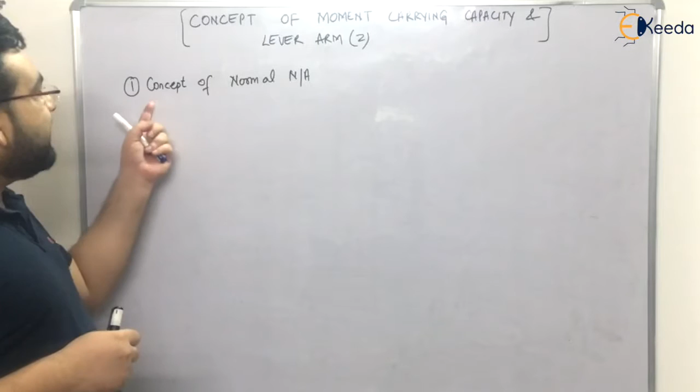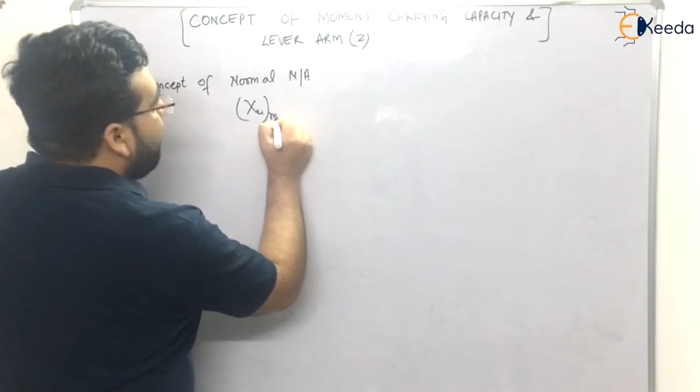But before that, let us discuss the concept of the normal neutral axis. I told you that as per the limit state method, the ultimate maximum neutral axis, XU max, is given by 0.53D for Fe250, 0.48D for Fe415, and 0.46D for Fe550. I have already told you these things, right?

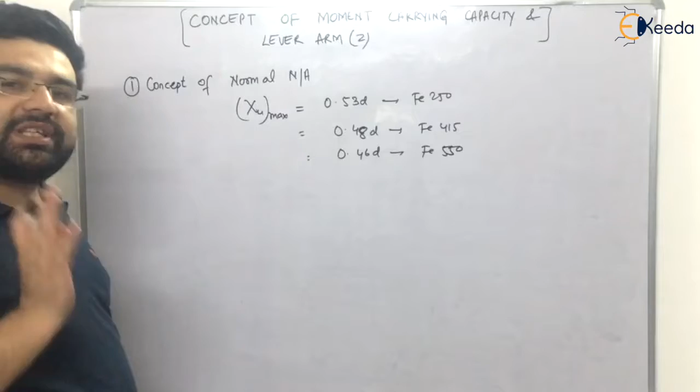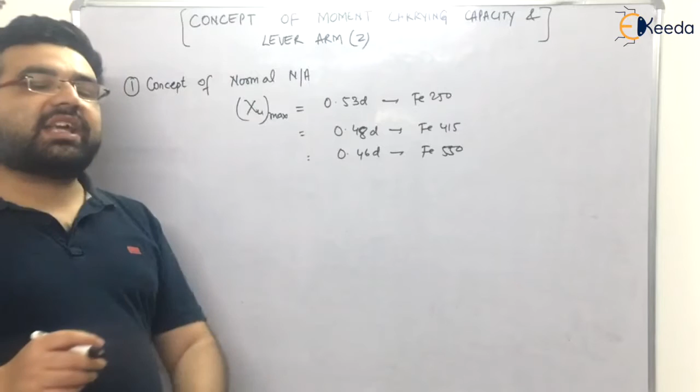Now, in working stress method, we also came up with the concept of normal neutral axis. Is it the same here also? Yes, the same here as there. In working stress method, we got the normal neutral axis by the static equilibrium condition, remember? Here also we have to apply the static equilibrium condition. So what is the static equilibrium condition? The compressive force is equal to the tensile force.

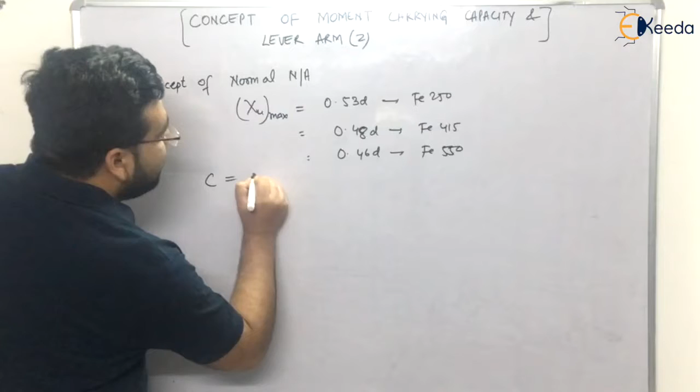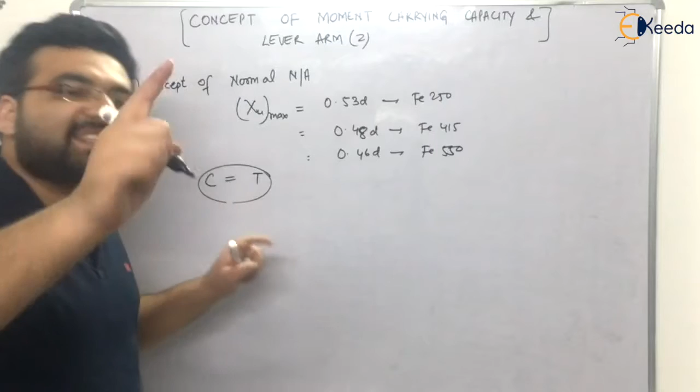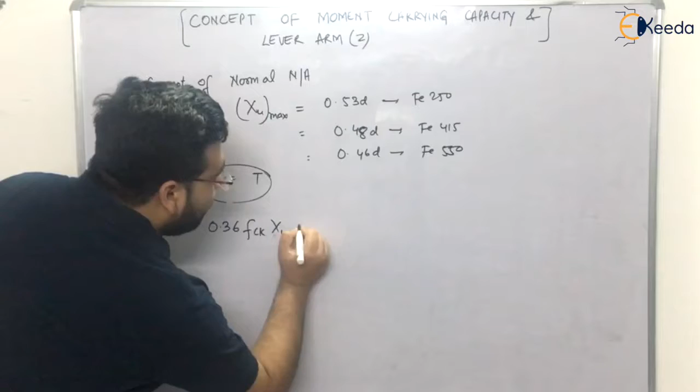Now you will see why I had derived the total compressive force. So the total compressive force equals 0.36 FCK into XU into B. This is the total compressive stress into XU, FCK into XU into B. This is the total compressive force.

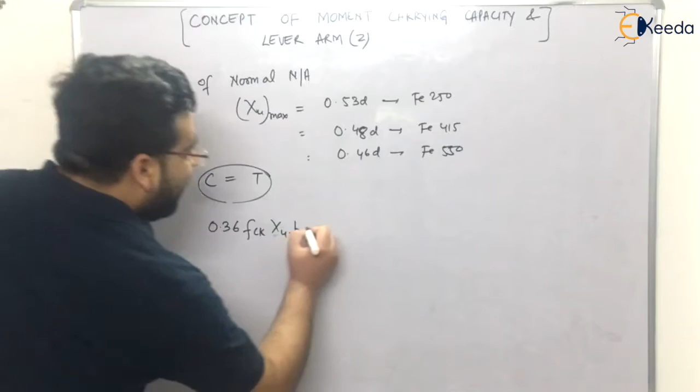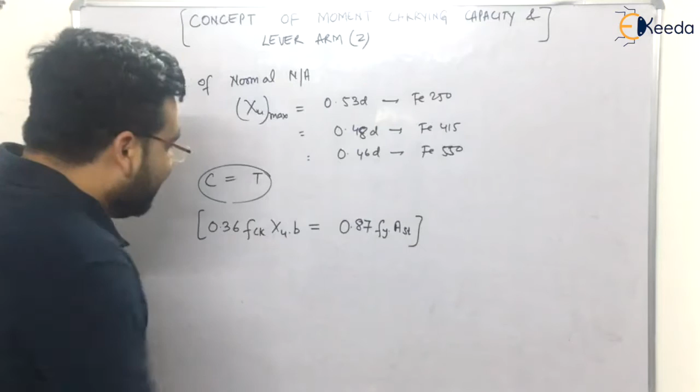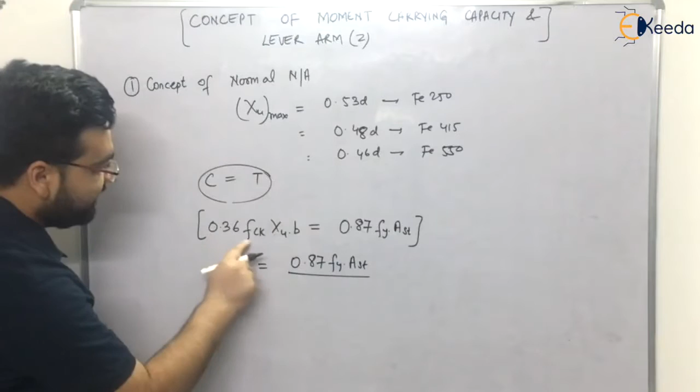This will actually be equal to the tensile force. And how much is the total tensile force? That is 0.87 Fy into AST. Now this XU is actually the normal neutral axis, not the maximum neutral axis. So XU will be equal to 0.87 Fy into AST divided by 0.36 FCK. So this is the normal neutral axis.

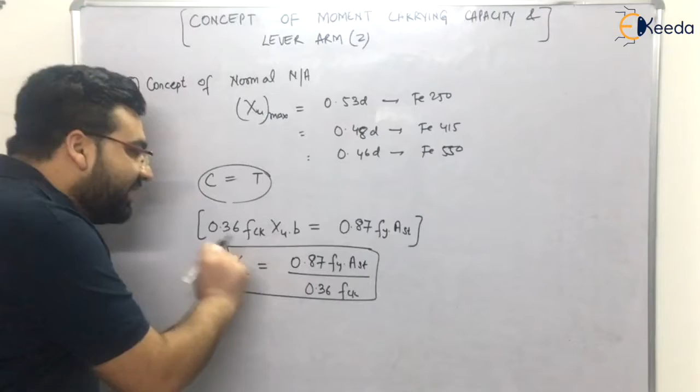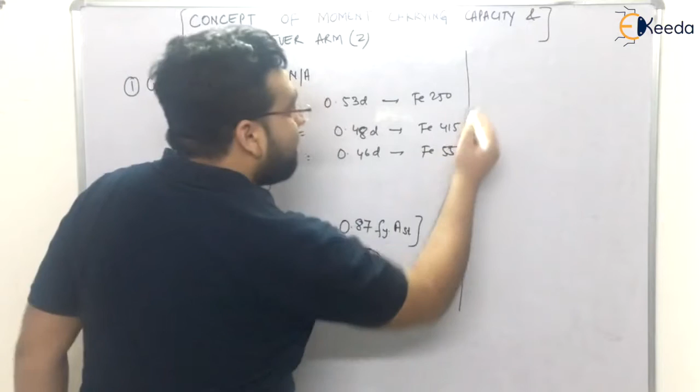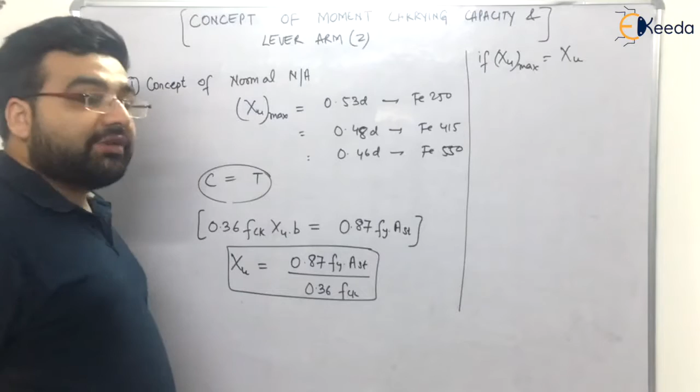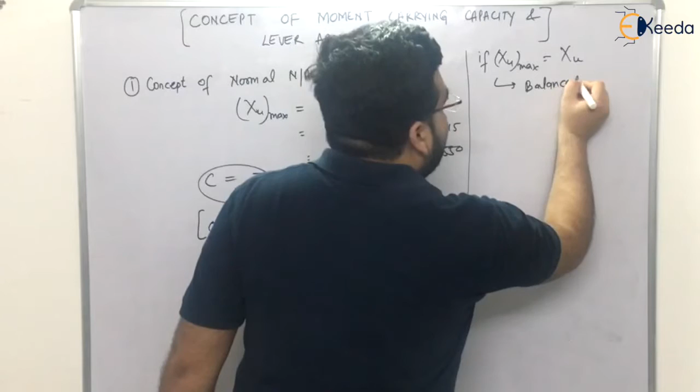Simple, right? Now let us discuss three conditions, relating the working stress method with the limit state method. In working stress method, if XU max equals XU, or the actual neutral axis, it was a balanced condition. Is it the same case here? Yes, if XU max equals XU, it is a case of balanced section. And when you have a balanced section, then C is equal to T.

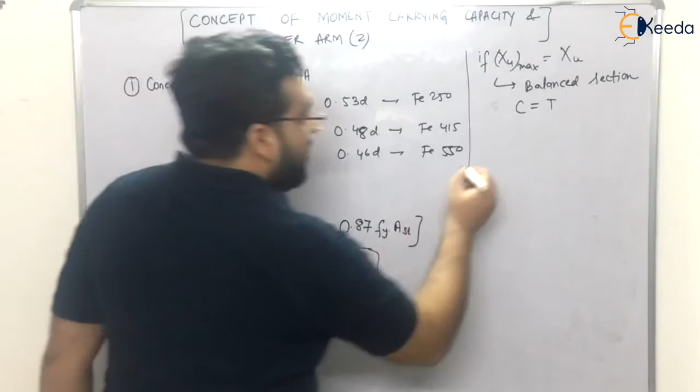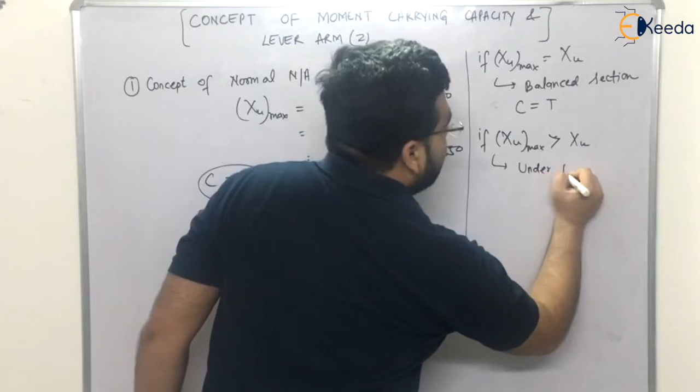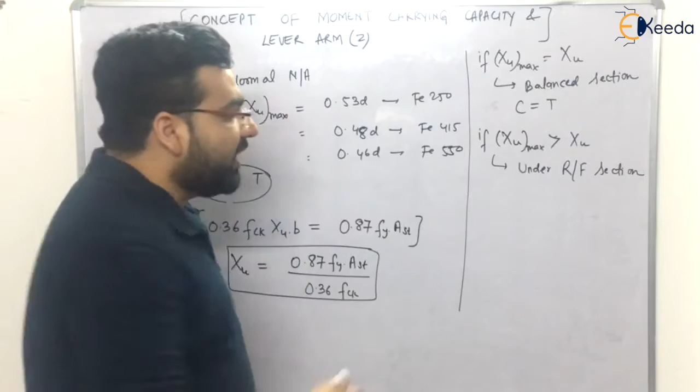Second, if XU max is greater than XU, then in working stress method this was a case of under-reinforced section. So here also the same case: it will be an under-reinforced section. And when you have an under-reinforced section, the reinforcement has a higher stress, so T will be greater than C.

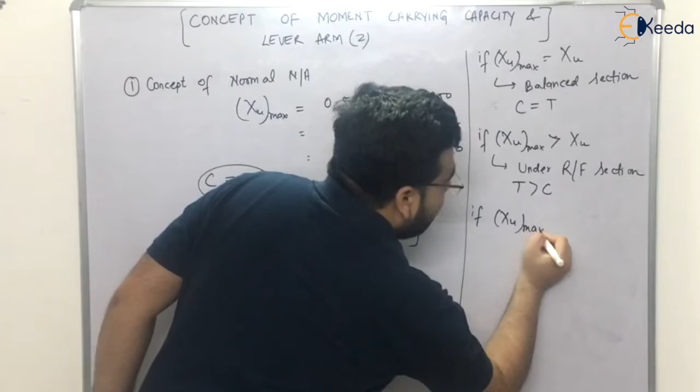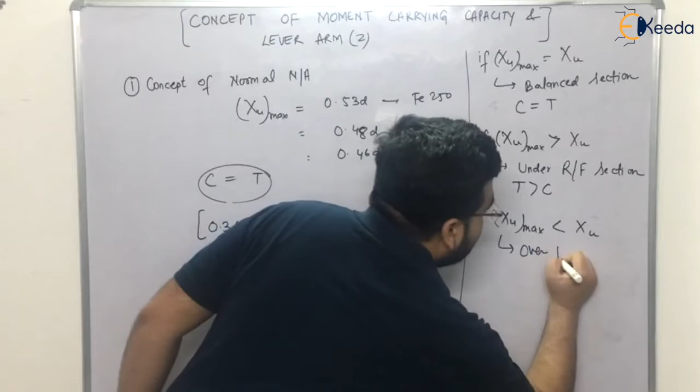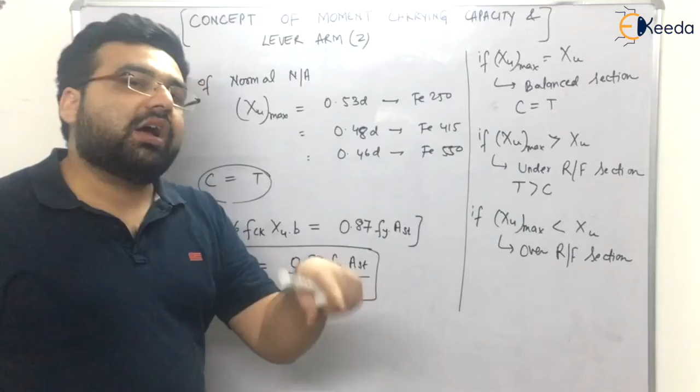Third, if XU max is smaller than XU, in working stress method this condition was an over-reinforced section. Here also it is an over-reinforced section. And when you have an over-reinforced section, the concrete fails earlier, meaning the compressive stress is higher compared to the tensile stress, so C is greater than T.

Simple, right? So I have related the working stress method with the limit state method. I hope you have understood the concept of balanced, under-reinforced and over-reinforced sections. Very important, because many numericals have been asked from this topic.

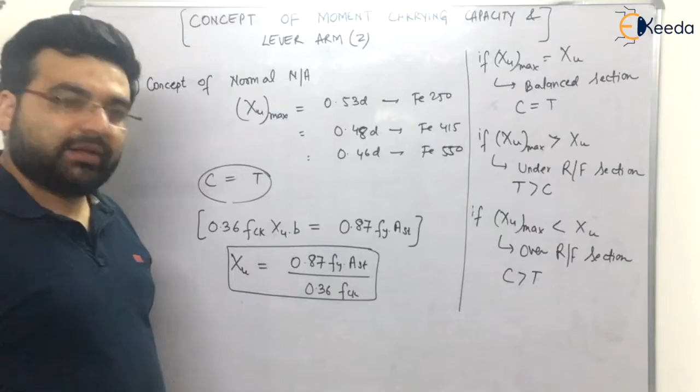Now let us move to our concept, that is the moment carrying capacity and lever arm. So how much will be the lever arm? Let me rub this.

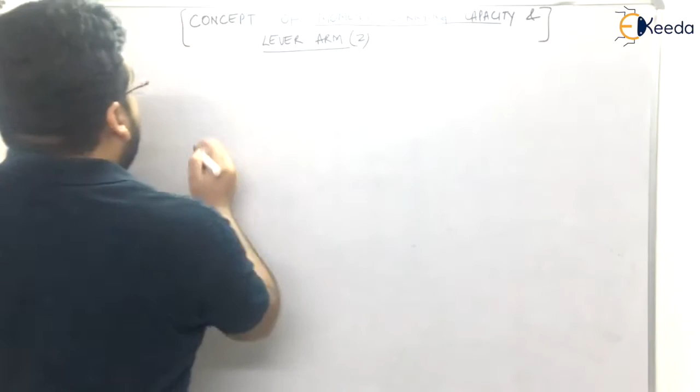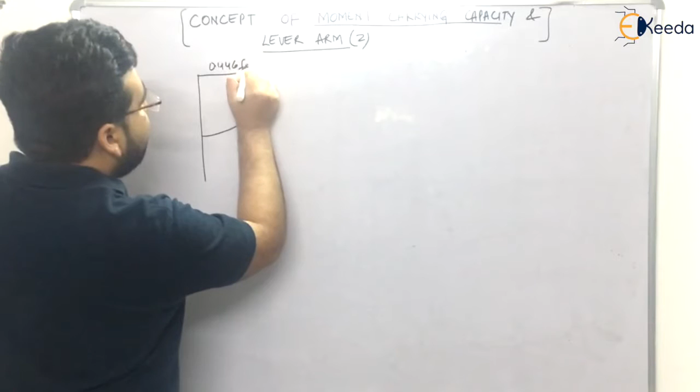Rectangle, parabola. This was 0.446 FCK. So lever arm is actually the distance between the center of the tensile reinforcement and the center of the compressive forces. This whole distance is small d, effective depth.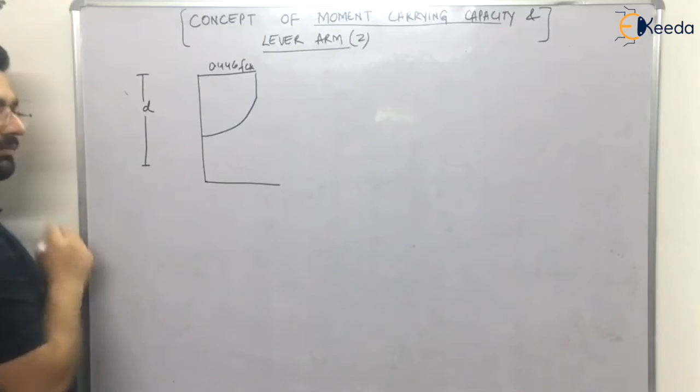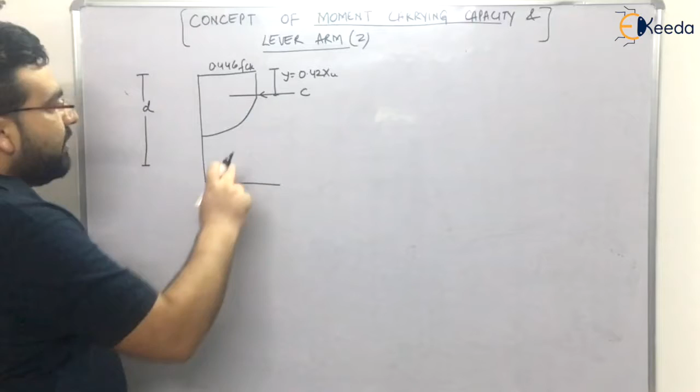Now this C force, the total compressive force, was acting at a distance y equals 0.42 xu. Remember it. Now let us see how much this distance will be. This distance is known as the lever arm Z, and it will be equal to d minus 0.42 xu.

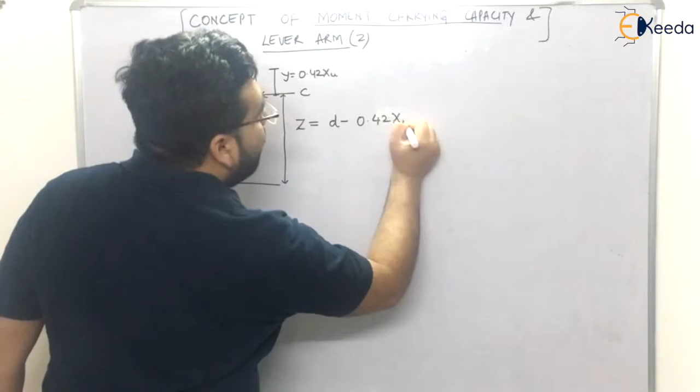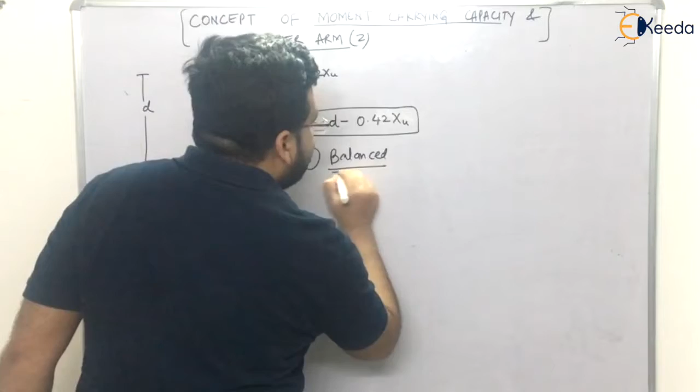Once you have got the lever arm, you can determine the moment carrying capacity or moment of resistance easily. For example, first case, it is balanced. For a balanced case, you can determine the moment of resistance for either the steel or the concrete, depending on what you want to do. Let us do both.

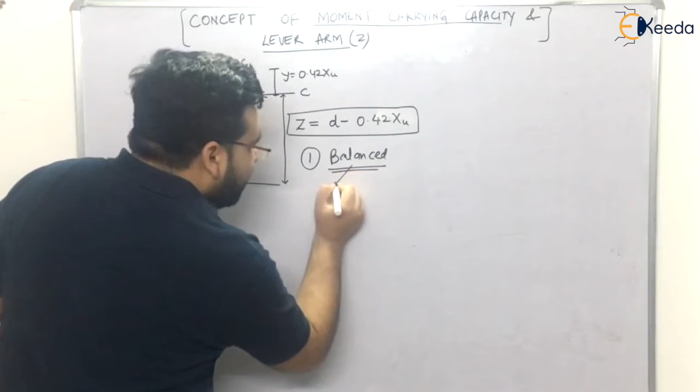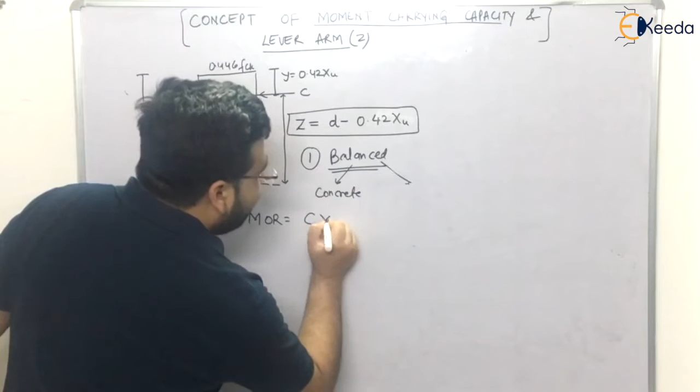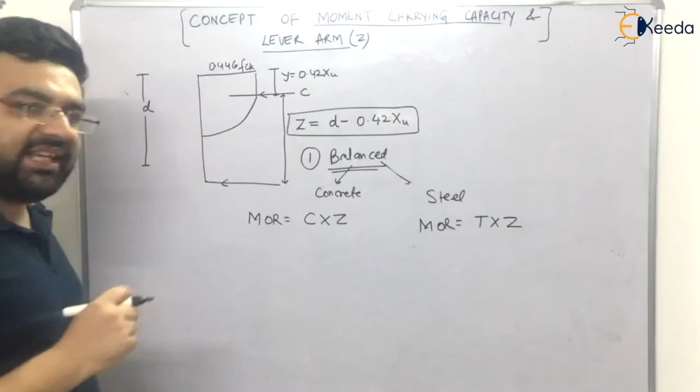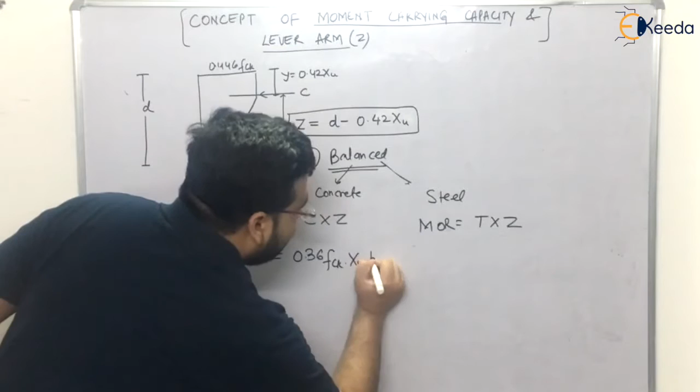For concrete, the moment carrying capacity or moment of resistance will be equal to C into Z. How much is C? 0.36 FCK into XU into B, and Z is D minus 0.42 XU. This is the moment of resistance with respect to concrete.

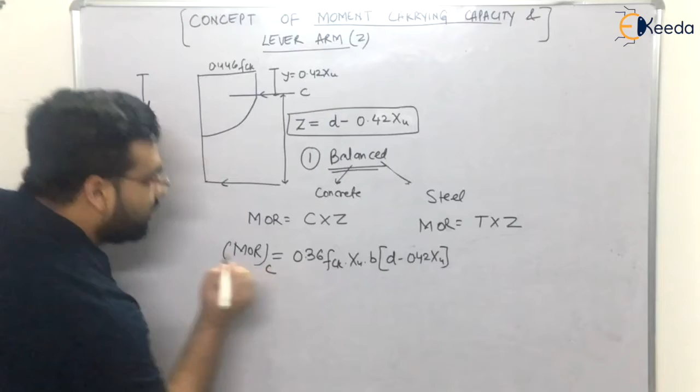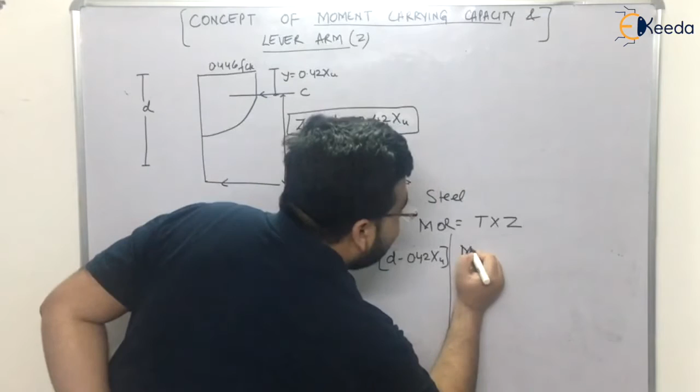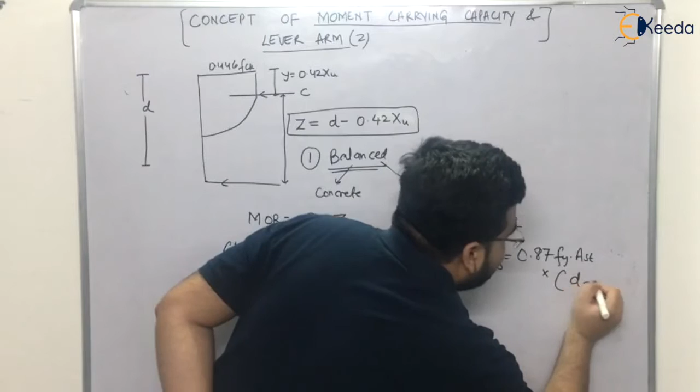Now what will be the moment of resistance with respect to steel? For steel, the moment of resistance will be equal to T into Z, that is force into distance. T is 0.87 FY into AST, and Z is D minus 0.42 Xu.

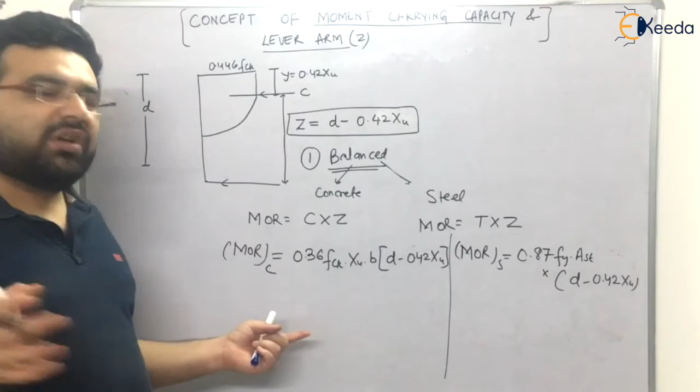The question is, sir, do I have to remember the formula? Depends on you, because I have remembered the formula. If you don't remember it, it will take a little bit more time, but I would recommend you remember it. It is very easy: force into time, force into distance.

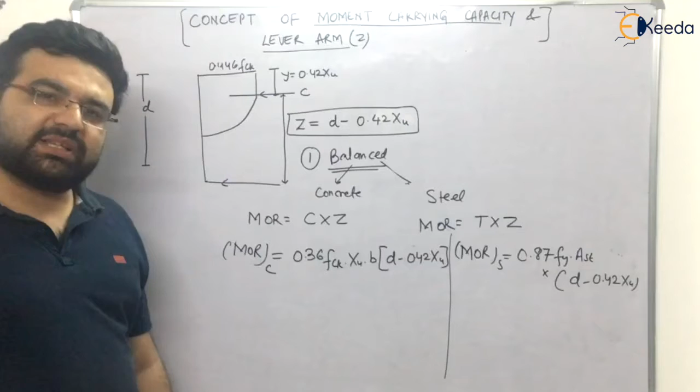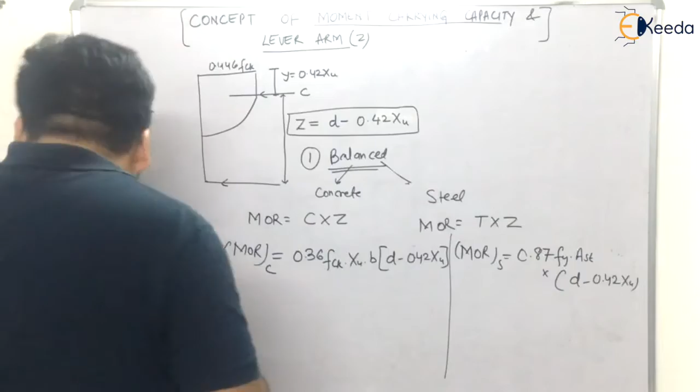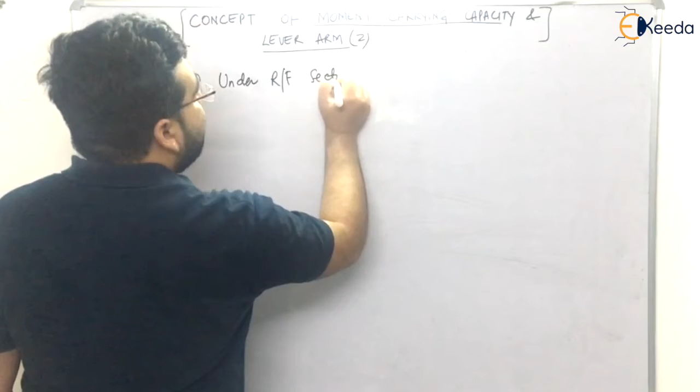Now, after balanced, the section which we usually adopt is the under-reinforced section. Let us see the expressions for under-reinforced sections. In working stress method, if the section was under-reinforced, we used to calculate the moment of resistance with respect to steel, because steel was attaining critical stress earlier compared to concrete. So here also, the critical section will be of steel.

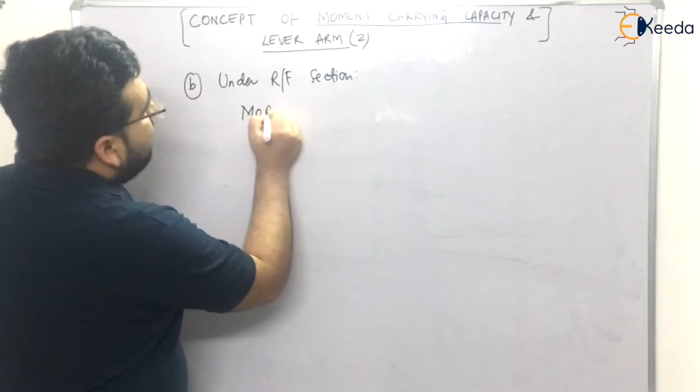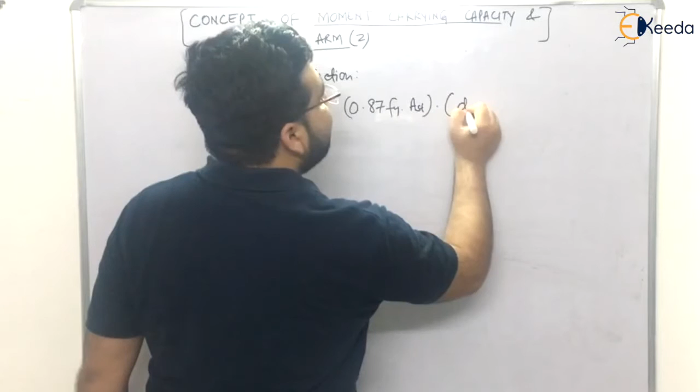So moment of resistance will be calculated for steel, that will be equal to 0.87 Fy into AST, this is force, into Z, where Z is D minus 0.42 XU.

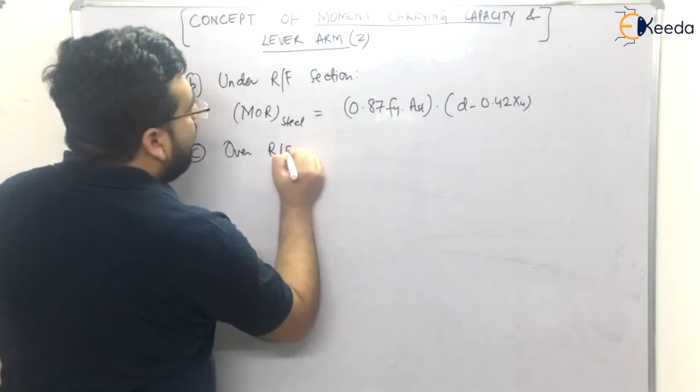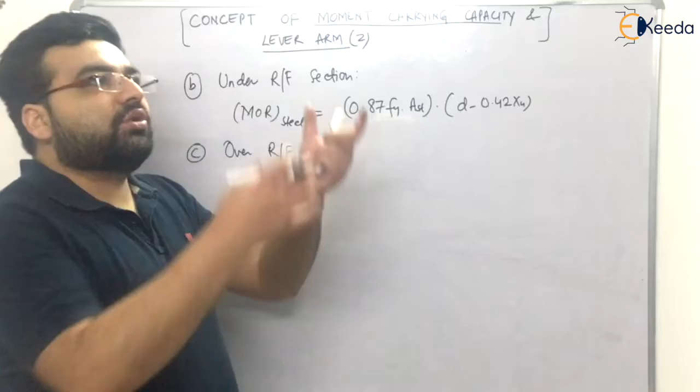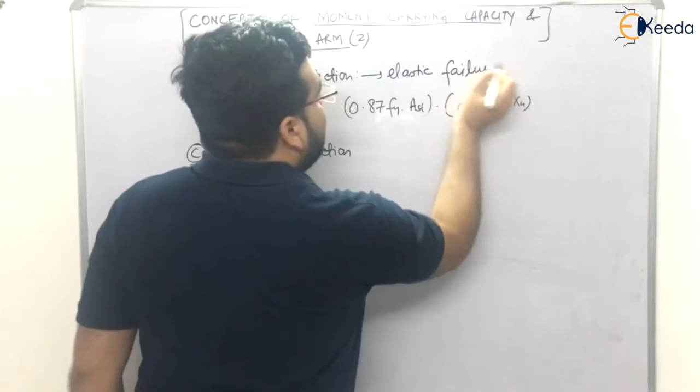Over-reinforced section: when you have an over-reinforced section which has higher stress, concrete has higher stress, meaning concrete will fail earlier. That is known as brittle failure. In the case of under-reinforced section, it is known as elastic failure. For over-reinforced section, it is brittle failure, meaning it will fail at a moment without giving any warning.

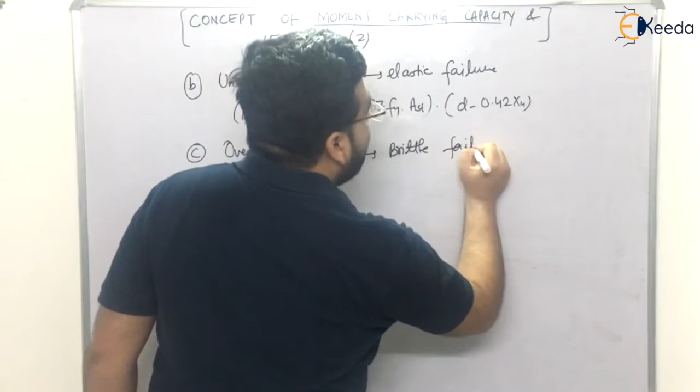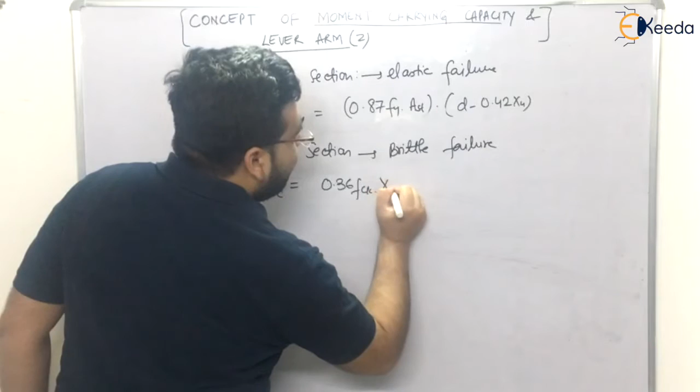So moment of resistance with respect to concrete is equal to 0.36 FCK XU into B, this is force, into Z, where Z is D minus 0.42 XU. Very simple.

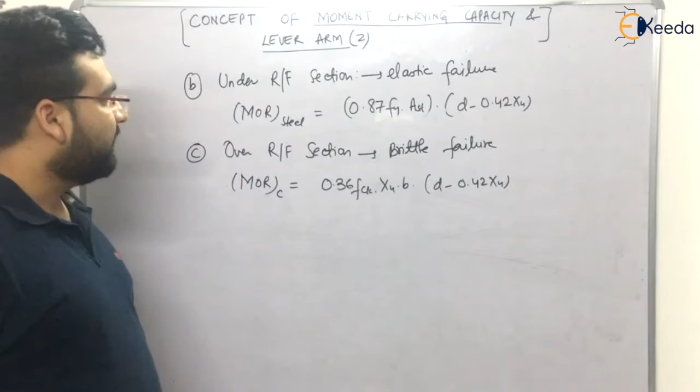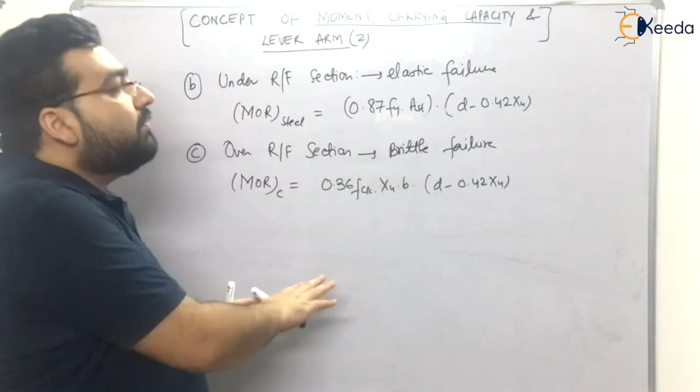So students, I hope you have now understood the concept of moment of resistance, moment carrying capacity, and lever arm. It is a very simple topic because I have not explained it very deeply, as I already covered that in the working stress method video. Without watching that video, this will not be an easy topic, since for many students this is a mountain, a very difficult topic, but now it's a cakewalk. I hope you have understood each and every topic.